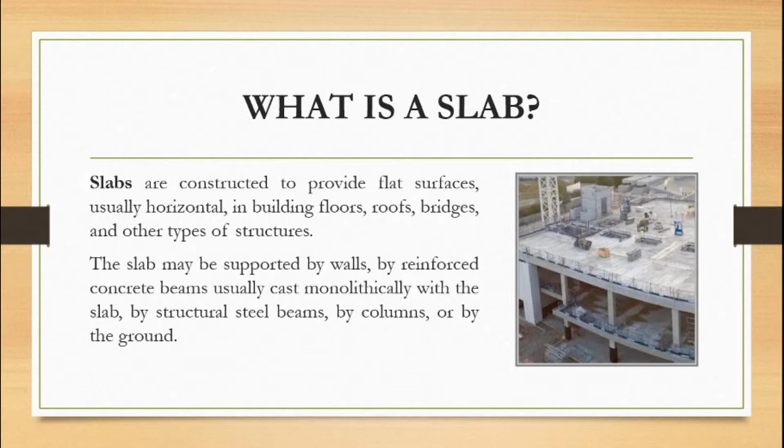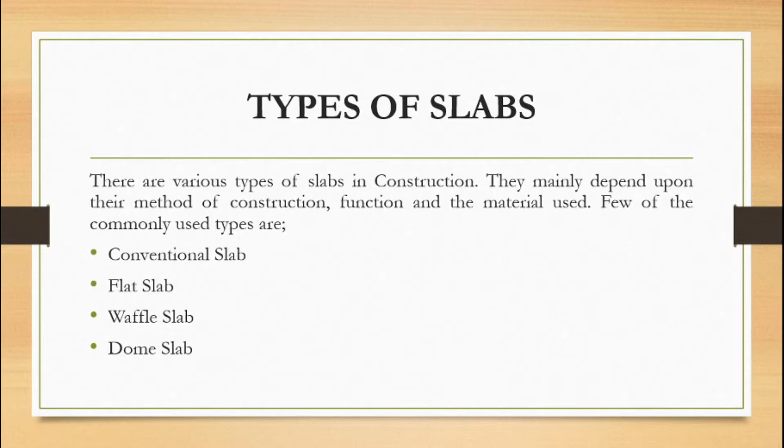Types of slabs: there are various types of slabs used in building construction. We differentiate them according to their method of construction, the function they are used for, and the material used for constructing them. A few of the very common types are conventional slab, flat slab, waffle slab, dome slab, pitched roof slab, corrugated slab, hardy slab, and sunken slab.

First of all, we are going to start with the conventional slab. This is the slab which is supported by beams and columns. In this kind of slab, the thickness of the slab is small but the depth of the beam is large, and the load is transferred to the beams, from the beams to columns, and then towards the foundation.

Here in the picture, this is the conventional slab, and it is being supported by these horizontal members termed as beams and these vertical members termed as columns. So basically the load carriers are these beams and columns, which transfer the load from the top floor slab till the foundations. This type of slab requires more formwork as compared to the flat slab.

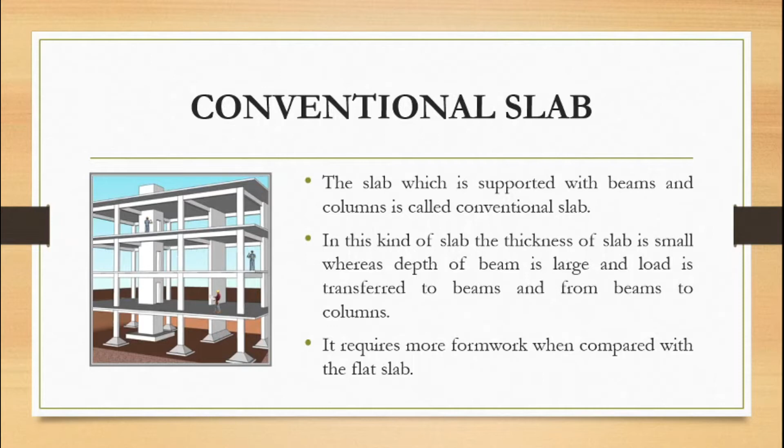We will discuss the flat slab later. The thickness of a conventional slab is 4 inches. 5 inches to 6 inches. This thickness is recommended if the slab is going to receive occasional heavy loads, such as in our homes, where there is very lightweight dead load from furniture, and the wall load is also very minimal.

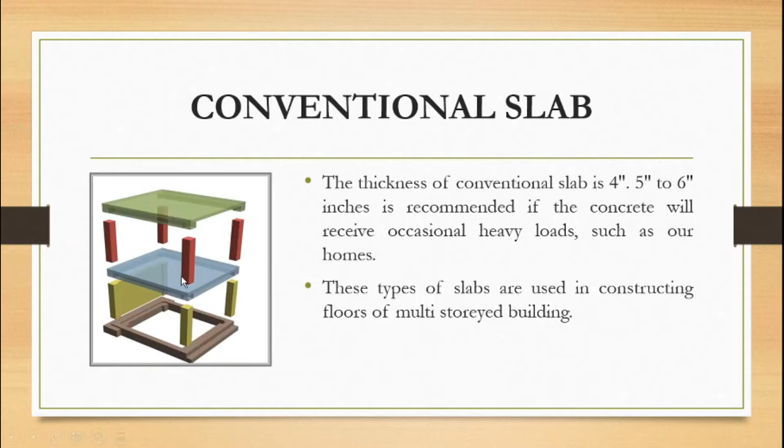So we use this type of conventional slab in our houses, but the only difference is that instead of using beams and columns, we use load-bearing walls. So a conventional slab can actually be used for load-bearing walls as well as for column and beam structures. These types of slabs are used in constructing floors of multi-story buildings.

Now there are two ways in which these slabs can work. We can differentiate conventional slab into two types: one is one-way slab, and the other is two-way slab.

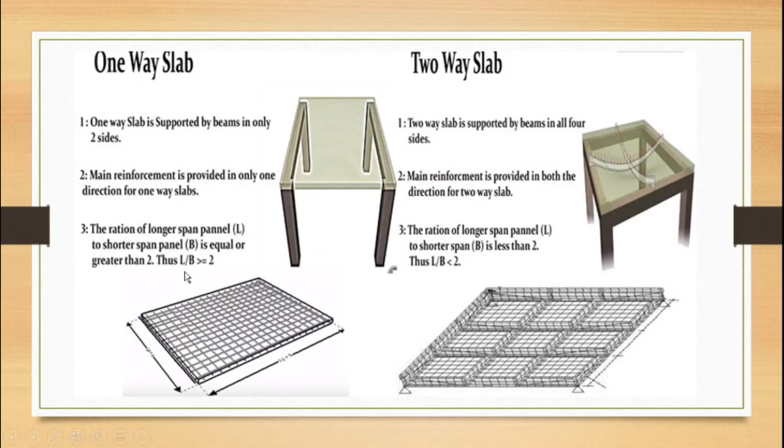Now the question comes, how do we decide whether to use a one-way slab or a two-way slab? For this we have a very simple formula. We take the length of the room, termed L, and the breadth of the room, termed B. If the ratio of the longer span L to the shorter span B is equal to or greater than 2, then we use a one-way slab.

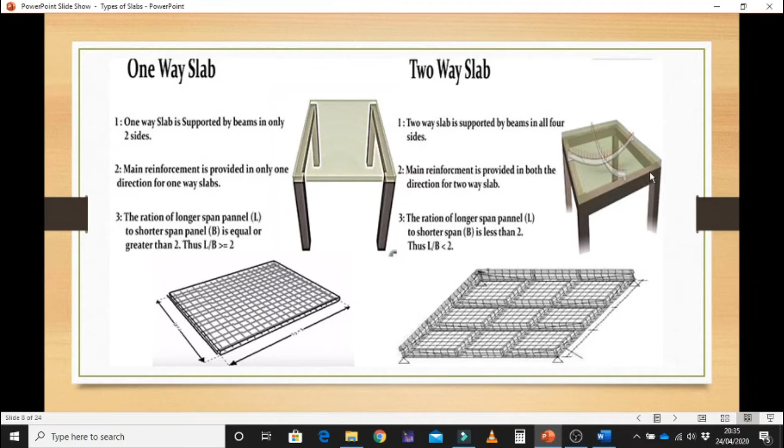And if the ratio of the longer span L to the shorter span B is less than 2, then we are going to use a two-way slab.

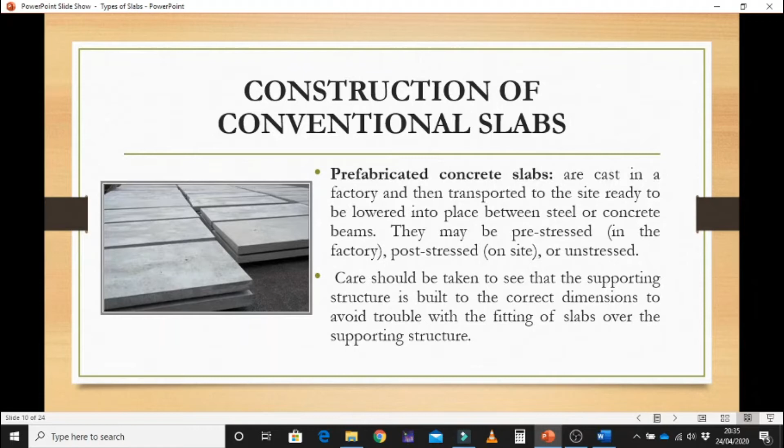Now, how do we construct these conventional slabs? There are basically two ways in which we can cast a concrete slab: one is in-situ concrete slabs, and the second is prefabricated or precast concrete slabs.

Let's first discuss the in-situ concrete slabs. These slabs are constructed on site and we use formwork for construction. Formwork is a box-like setup in which concrete is poured for the construction of the slab. For reinforced concrete slabs, reinforcing steel bars are placed within the formwork and then the concrete is poured.

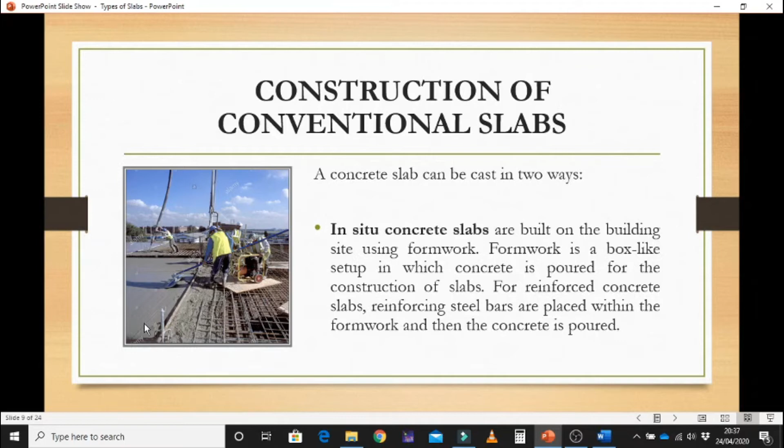This is because they have to level it and all, and concrete mixture sets in really quickly.

The other type of construction is prefabricated concrete slabs. These are cast in the factory and then transported to the site, where they are used by lowering into place between steel or concrete beams. These are kind of ready-made conventional concrete slabs, and they may be pre-stressed, post-stressed, or unstressed.

The normal concrete slab has steel bars - I'm talking about the RCC slab. It has steel bars in it, and in normal condition they are unstressed. Then we have a condition where we pre-stress the concrete slabs.

The process is that in a mold we add the reinforcing steel bars and introduce internal tensile stress into them, then the concrete is poured into the mold and left to cure. For post-stress slabs, in the molds we provide hollow pipes through which the steel reinforcement bars are passed, and then we pour the concrete into that mold.

Once the concrete is fully cured, we take the slab out of the mold and then provide stress to the steel. These are two ways we use to provide additional strength to the concrete slab, by using the high tensile strength of the steel and using the high compressive strength of the concrete.

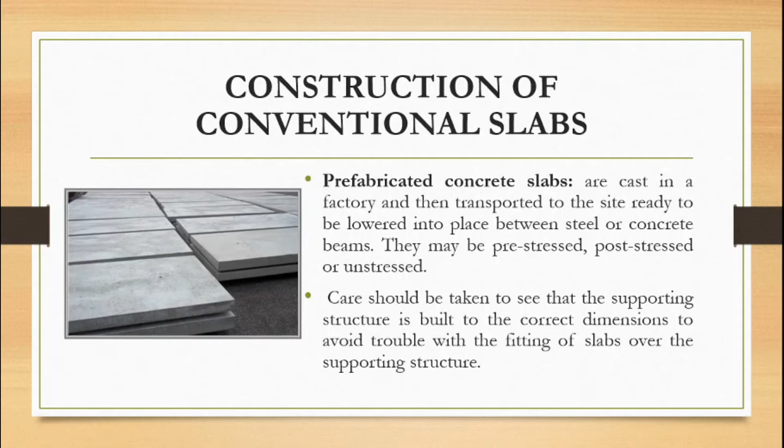Next one is the flat slab. A flat slab is a reinforced concrete slab which is directly supported by the concrete columns. It does not have any kind of beams to support it - it's directly supported by the columns, and the load is directly transferred from the slab to the column, then slab to column again, and finally to the foundations of the building.

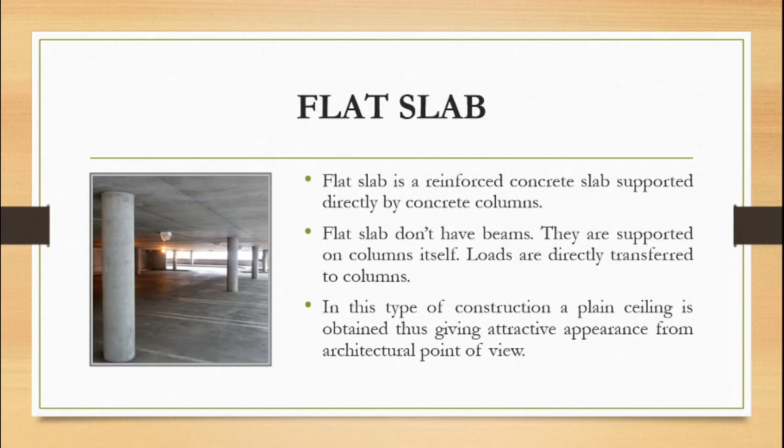In this type of construction, using a flat slab gives us a plain ceiling, which is a very attractive appearance from an architectural point of view. A flat slab is easier to construct and requires less formwork. The minimum thickness for a flat slab is 8 inches.

Flat slabs are generally used in parking decks, commercial buildings, hotels, or places where beam projections are not desired. Because it doesn't look nice if in a hotel room you're looking at the ceiling and there is a drop beam that you can see. It doesn't look nice at all.

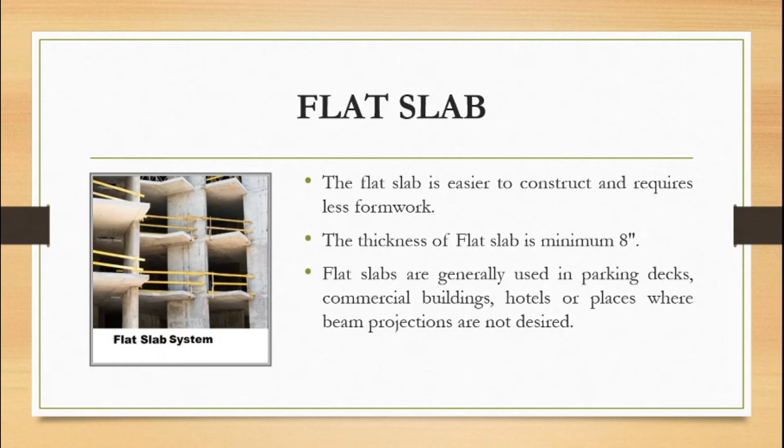A plain flat ceiling would be much nicer to look at. Although they have provided false ceiling construction in hotel rooms, the false ceiling would also be hindered if there is a drop beam there. Using a flat slab is ideal there.

There are four different types of flat slabs. The first one is a slab resting on the column directly - the column does not have any capital, and there is no drop panel with the slab as well.

Just simple like this. Then we have a flat slab with no drop panel, but the column has a column head. This column head is providing extra surface along with the column for the slab to rest on, increasing the connection and bonding between the slab and the column.

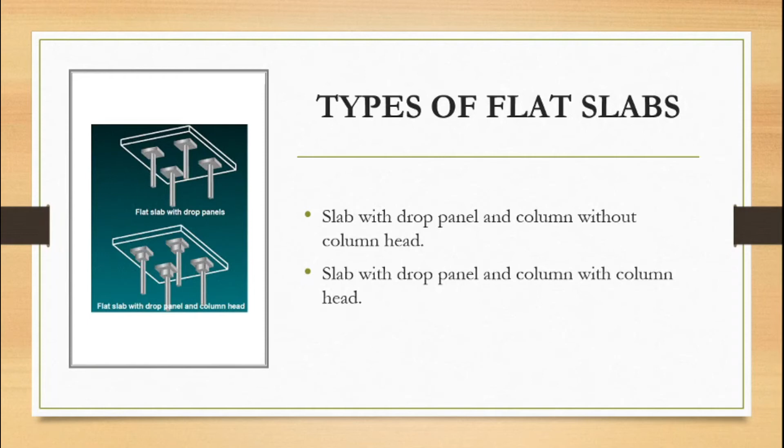Next one is a slab with a drop panel and column without a column head. This drop panel is attached with the slab itself, or cast monolithically with the slab, and this drop panel slab rests directly on the column with no column head.

And then we have a slab which does have a drop panel, monolithically cast with the slab, and the column also has the head, the capital, on it. Providing these drop panels and column heads increases the surface area in contact from the column to the slab, allowing the load to be properly transferred from the slab to the column.

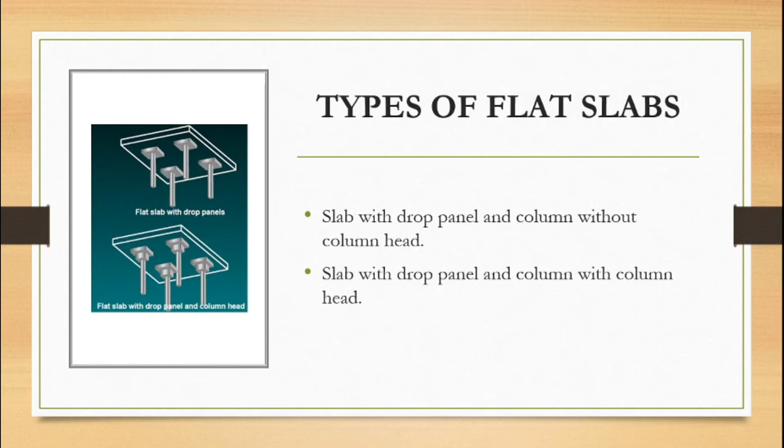Next is the waffle slab. A waffle slab is a type of slab with holes underneath, like this, giving an appearance of waffles - waffles is actually the name of the shape. We use waffle slabs where we need to provide large spans, for example auditoriums and cinema halls, where we do not wish columns to interfere in that space, because column and beam structures have their own limitations.

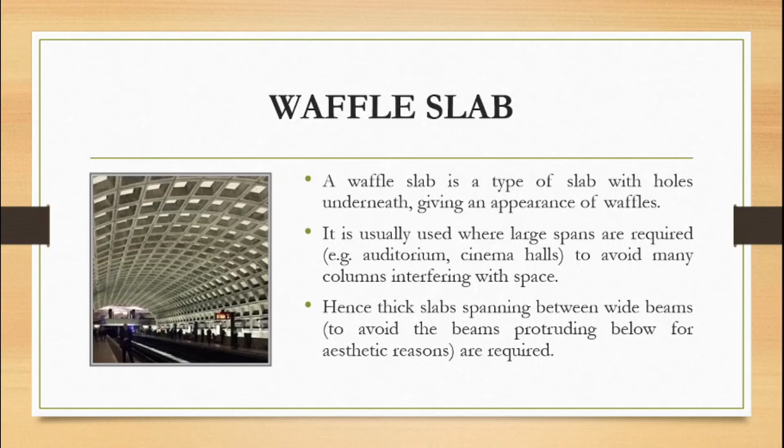We cannot provide a column-beam structure for spans more than say 30 feet or so. So if we wish to provide a space with no column interruptions, we have to devise other ways of constructing a roof slab that provides hindrance-free space. For that we require thick slabs that span between wide beams, avoiding beams protruding below for aesthetic reasons. The waffle slab holds a greater amount of load compared to a conventional concrete slab because of its shape.

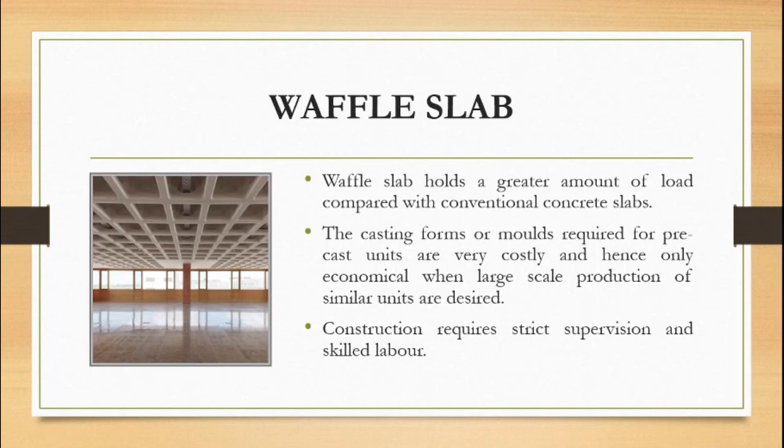The casting forms or molds required for precasting these units are very costly, and we use them only where large scale production is required, then they become economical in construction. Construction also requires strict supervision as well as skilled labor. Not every laborer can construct a waffle slab.

There are two types of waffle slabs depending upon the shape of the pods. Pods are actually PVC trays or molds. They are classified into two: the triangular pod system, with molds that are triangular in shape and cast a triangular waffle slab, and the square pod system, with square molds that cast a square waffle slab.

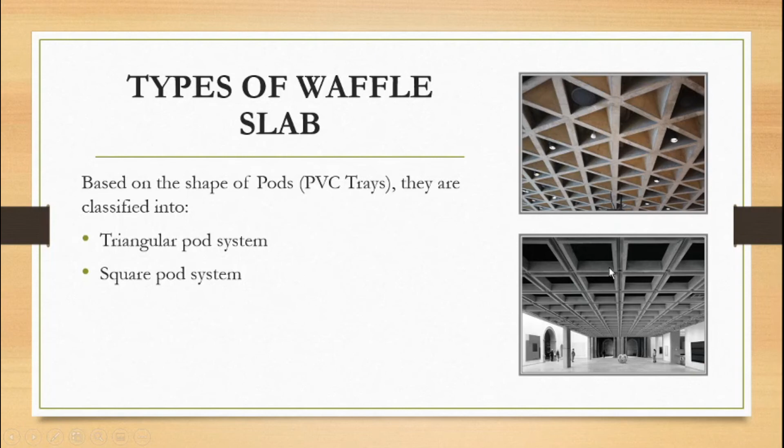Another form we can use for spanning large spaces is a dome slab. Domes are semicircular in shape, and the shuttering is done similarly to a conventional slab, but in a dome shape. The concrete is then filled into that shuttering, forming dome shapes. The thickness of this dome slab is very less, only 0.15 meters. These kinds of slabs are generally constructed in temples, mosques, or palaces.

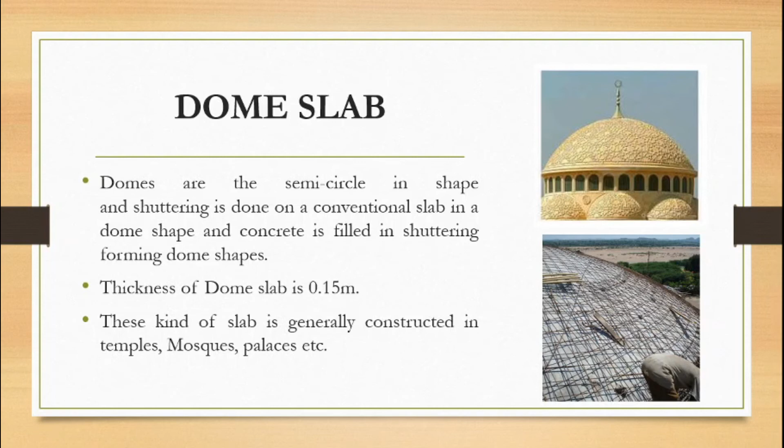Pitch roof slabs. A pitch roof is an inclined slab, a slab which has a slope, and it is generally constructed in areas where there is snowfall, so that the roofs can avoid snow loading on them. Sometimes we also provide these types of pitched roofs in resorts so that the buildings can give a natural look.

Compared to traditional roofing materials, the typical tile sheets used in pitched roof slabs are extremely lightweight. For this reason, this type of roof slab significantly reduces the amount of timber or steel structural requirements, which ultimately results in significant cost savings.

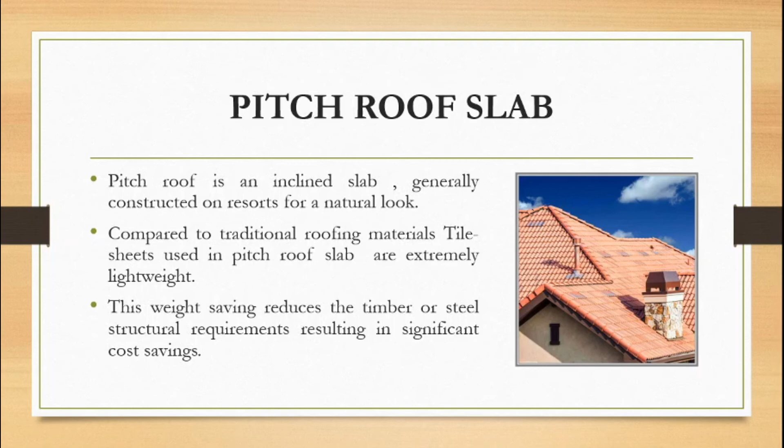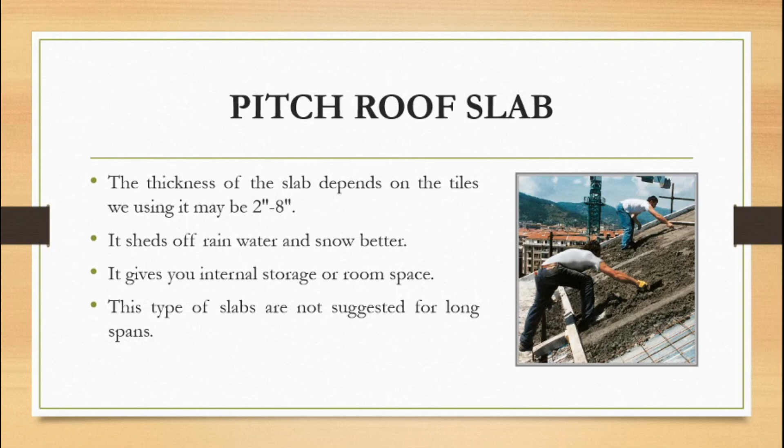The thickness of the slab depends on the tiles being used; it may vary from 2 inches to 8 inches. It sheds off rainwater and snow better, and it also gives internal storage or room space, which we call an attic. This is just like a conventional slab, but it is poured on an inclination. This type of slab is not suggested when longer spans are required.

Corrugated slab. The difference between this slab and a normal concrete slab is that the concrete is poured over a corrugated steel tray; this shape is termed corrugation. By pouring concrete onto this corrugated sheet, the resulting corrugated concrete slab improves strength and prevents the slab from bending under its own weight.

The corrugation always runs across the shorter dimension. For example, if a room has a length of 50 feet and a width of 30 feet, this corrugated slab is going to be placed on the width side, across the 30 feet.

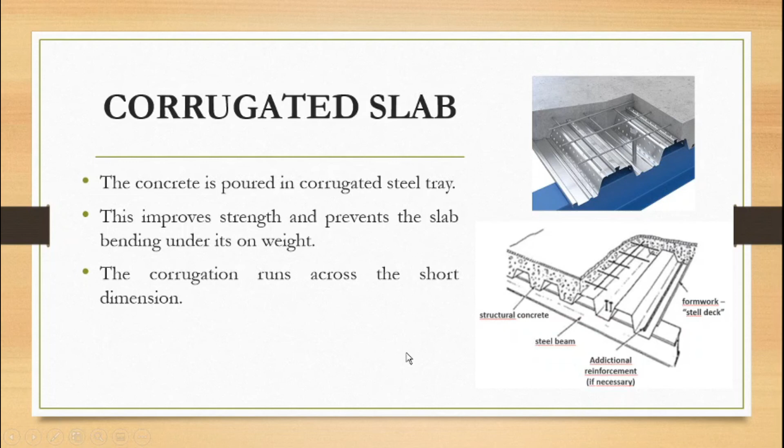Next one is the hardy slab. Hardy slabs are used where temperatures are very high, and to resist the temperature from the top, the slab thickness is increased. These are made out of hardy bricks, which look like this. Construction of hardy slabs is very common in Dubai and China. Hardy bricks are hollow bricks made up of concrete.

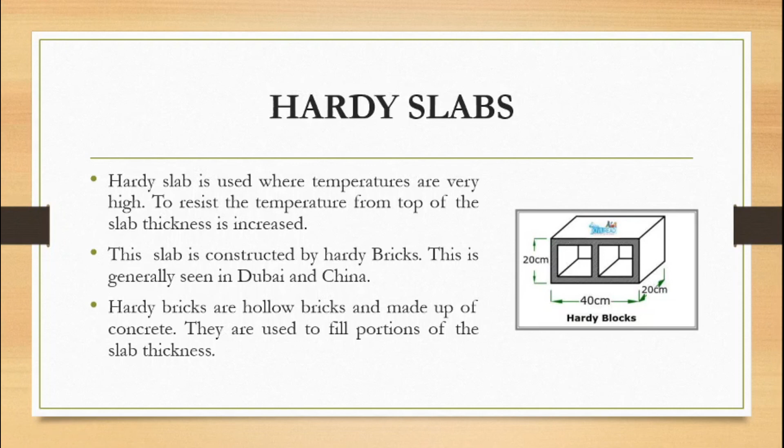Since they are hollow, they have more slab thickness and are used to fill portions of the slab. By making these concrete blocks hollow from inside, we save on the amount of concrete, hence the own weight of the slab is reduced. That means they are wide enough and thick enough, but have less weight. This kind of slab has more thickness compared to the conventional slab; the thickness of the hardy slab is 0.27 meters.

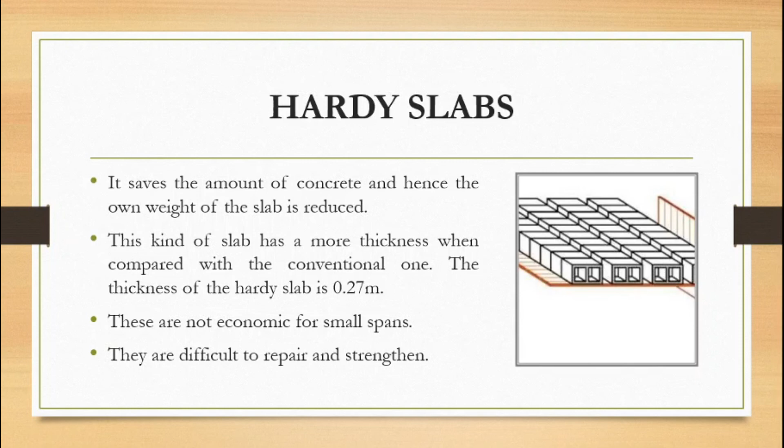The use of this hardy slab is not at all economical for smaller spans. They are difficult to repair, and they cannot be strengthened once there is damage in the slab.

After casting, the sewage pipes in the slab are filled with coal or broken pieces of bricks. We mostly use broken pieces of bricks, also called brick ballast, in our houses.

So that is all about the basic information regarding the slabs that we use in building construction. Hope it was very easy and understandable for you as a beginner. Thank you very much.